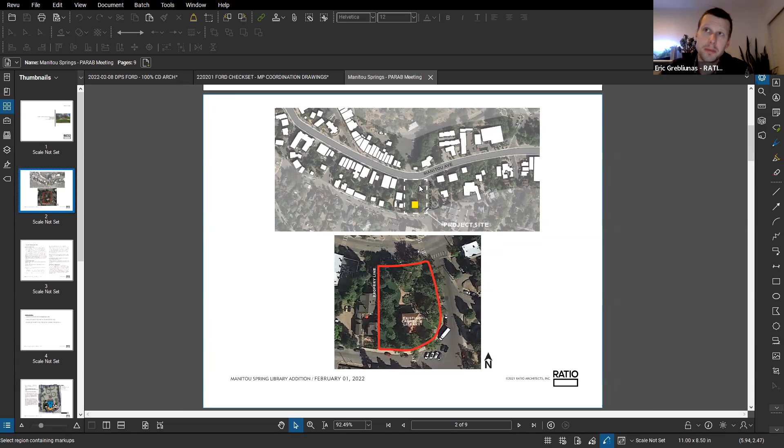All right, well, thanks everyone for having us. This is the Manitou Springs Carnegie Library Addition project. Just to refresh everyone's memory here, the Carnegie Library sits on the large park space on Manitou Avenue.

I'm on PARAB right now. Okay, I'll talk to you later. Bye.

A brief description of the project is that we are adding on to the existing Carnegie Library to bring it into the 21st century for libraries and provide a bunch of flexibility and accessibility to the library space.

I'm assuming I've talked with most of you in the past over our other meetings with Parab, and some really key items that came up is that we want to make sure you're minimizing the hardscapes and maximizing grass area. We want to minimize the impact the addition has on park space, and we wanted to explore the opportunities of the addition further to the south and some of the previous design options we've seen.

Sorry, give me just a moment. Could everybody make sure if you're not speaking, you're muted? We're getting some ambient noise. Someone is distracted. Thank you.

Thanks for bringing that up. The key elements for this addition and for this project to be successful are that we need to assure the Carnegie Library remains that celebrated moment and the prominent structure on this historic site, and that we're preserving as much park space as possible. I think the last time we got together there was general agreement on the direction we were heading, with some comments. The meeting ended with us still needing to go to city council, talk with the city engineers, and discuss site parking requirements. We wanted to circle back with Parab to make sure that if anything changed, we'd report back and show the ramifications of those changes.

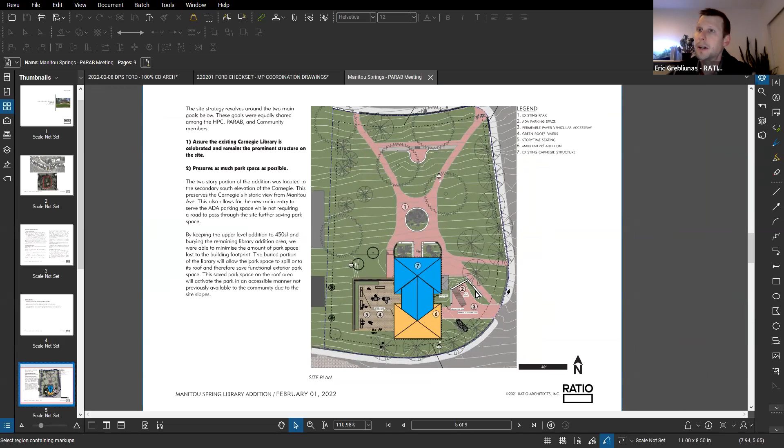I think that covers, in general, the minimal impact we've made to the site. Something else to point out, brought up by Parab, was the desire to have this walkway to the north be as small as possible. So we've reduced that down to a 6-foot pinch point from the existing landscape to the edge of the sidewalk, again trying to keep it as small as possible and giving back as much grass space to the park as possible.

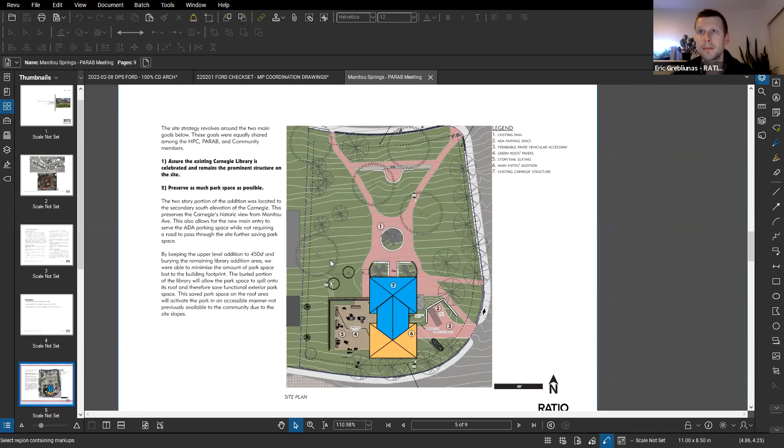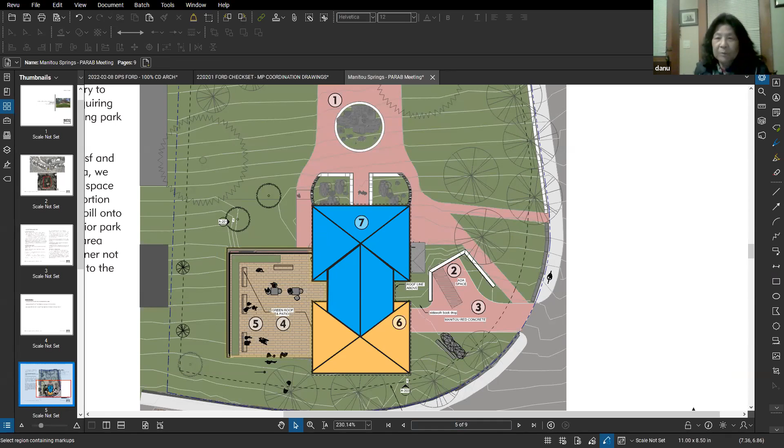I have just a quick question about the planters in front of the building—yes, the existing ones. When I look at the front of the building in your original first picture on the cover page, I feel like the library is really enhanced with the nice rounded windows and the low profile of the gardens there, where you can actually see more of the building. I was wondering, since we have all these nice rounded organic curves—the rounded grass area, the rounded curb area with the planter that's there now—is it possible to do that with your new planters, to make them rounder so they're not so 90-degree square coming out of that doorway, and soften that up, lowering the profile of those walls so they're more like curbs matching the height of the existing circle, to make it more rounded and organic and blend in with the natural contours that are there now?

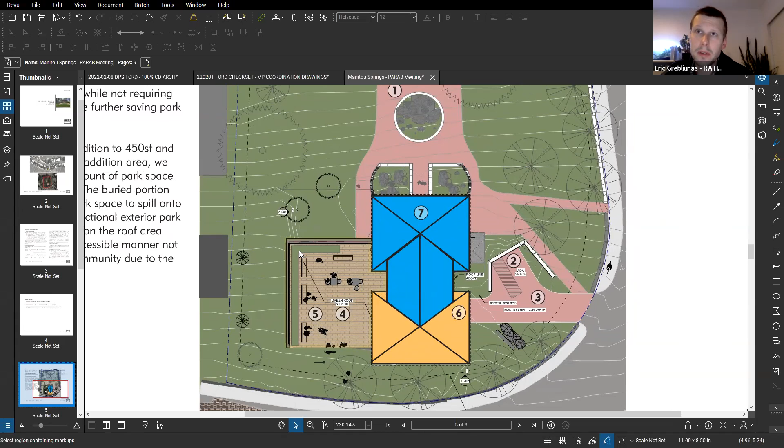Absolutely, we could definitely try to carry on more of the rounded aspects of the existing planters and hardscape work. Just to make sure we're on the same page, when you said the planters we have, were you referring to the green roof portion on the patio? No. It was the work just in front of the building—you actually have a better illustration of it further down in one of your pictures. So when we get there... well, maybe you don't.

So this is kind of the current. Yeah, do you have one? Yeah, right there, that guy.

Yeah, see how it's just so, to me, it looks so bulky and clumsy, and it doesn't have any flow or rhythm to it. And it really seems to me it takes away from the building. It'd be nice if the walls weren't built up so high, and maybe even if we had a little bit of space between the actual building and the planter itself.

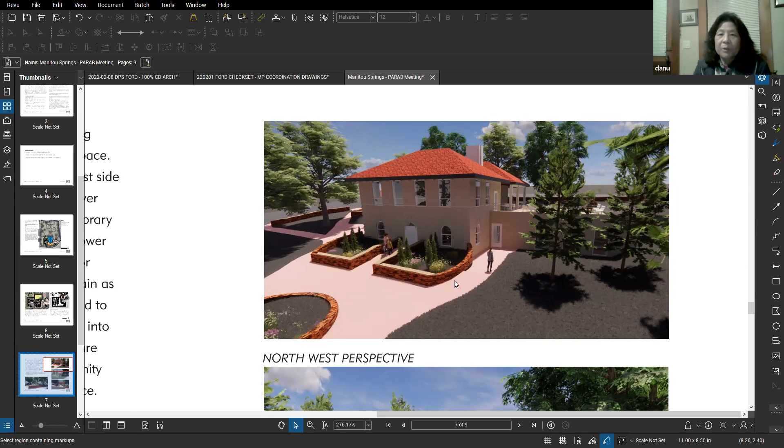Are we talking about these planters? Yes, correct. Understood. So maybe this will help clarify, but our intent is to leave the existing planters in place and not modify them.

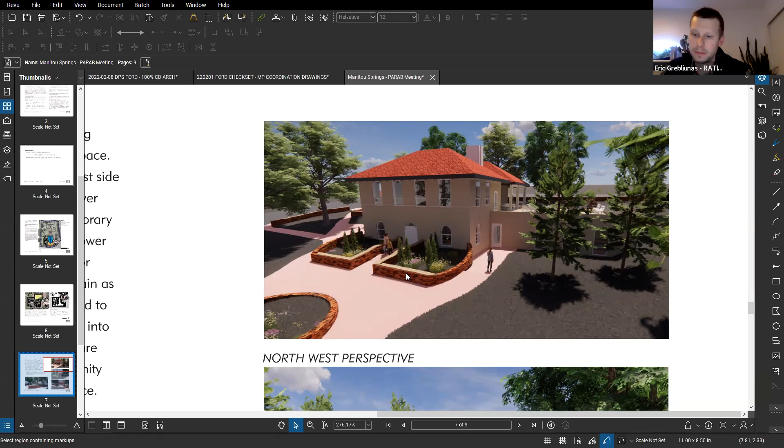Because they look pretty modified. Yeah, so I think what you're reacting to is just our rendering isn't exactly representative of what is there, but to clarify, the planters that are there right now would be the planters that will be there in the final design. We can make sure we clarify that in our plan moving forward.

Yeah, because it's very misleading the way you have it drawn. Yeah, I can appreciate that. The material isn't matched exactly, and the size. My apologies for that. But just to make sure we're all on the same page, the intent is that this is going to be the existing planter to remain, and we'll make sure to note that again.

I suppose we could do a little bit of a pink curb just to define it better, just to keep things contained, but nothing like the walls, because they definitely look like actual sitting walls that people could sit on. If you look on the corner of the building, they rise up pretty high there, going up against the building.

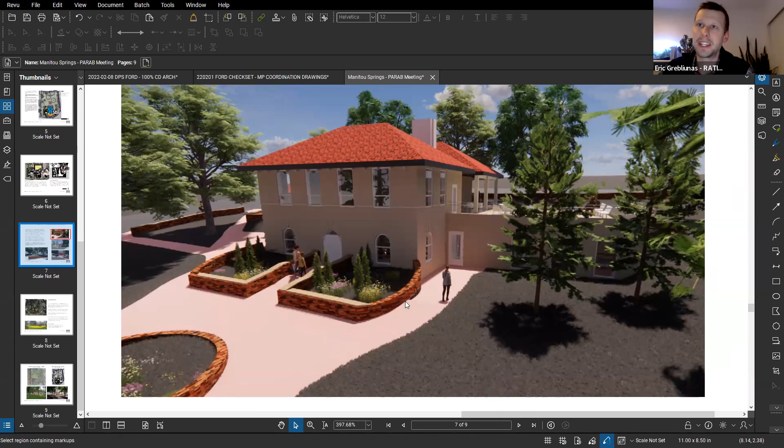Yeah, understood, that is just a graphical error on our part, I would say. Otherwise, I appreciate how much you've minimized the hardscape. I don't know, that's just me. I don't know if anybody else has any other different thoughts or feelings about that particular area.

I think it looks great. I think it's going to be a great addition, and about time. I'm glad we're jumping in. Well, I missed what Jan said. Jan, what did you say? I think it's a great addition and it's about time, and I'm glad we're jumping in. Okay.

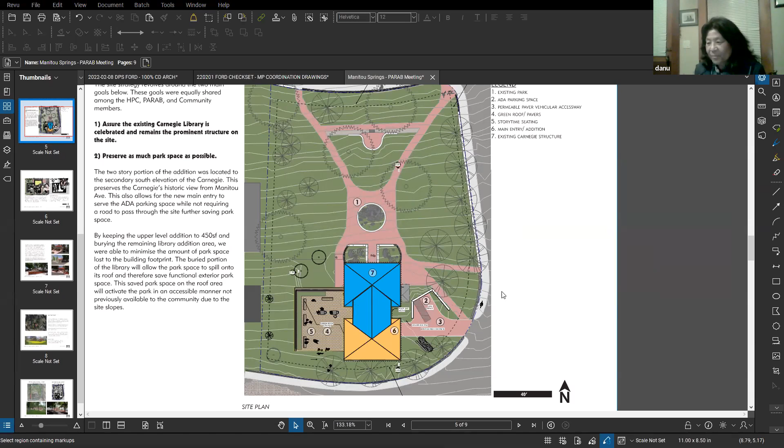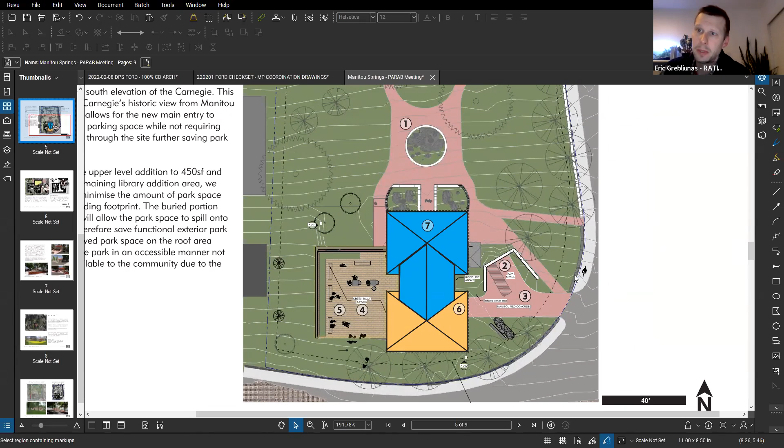And so I guess the other site element I want to point out is there will be a new retaining wall around this existing parking spot. The intent is for it to either match the existing planter or try to work with the existing site wall, depending on material availability we can find. But other than those areas, the remainder of the site is remaining as unchanged as possible.

I won't necessarily go through the floor plans in detail, but just to touch on them a bit: from the main entry and the ADA parking spot, you'd enter the building. There's a stair that would take you down to the lower level, or an elevator. Then we're repurposing the existing Carnegie on the upper floor for that community room, and looking at opportunities of reusing the existing casework there for some additional functionality. Then you have that outdoor patio space with the roof to spill out onto it.

And then on the lower level, again trying to give the user, once they get down there, views open to that north elevation looking out to the park. We're making sure we're providing a flexible space for the library to grow and adapt with whatever the future brings. The lower level children's library will remain for the children's area, and it's going to get an interior renovation as well.

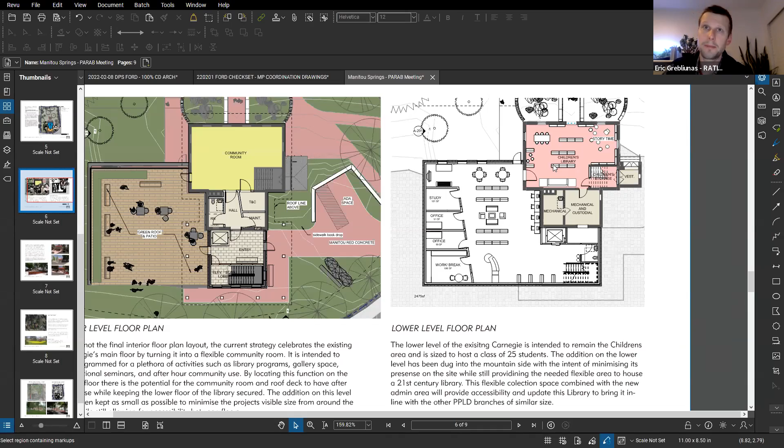And here's just some images. Again, just going to touch on how the addition is really tucked away, set back, and low profile to make sure the existing Carnegie has the priority and prominence on the site.

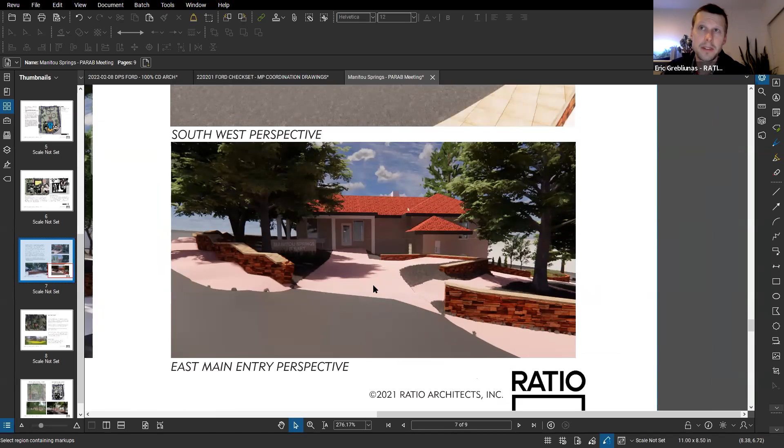Here's a visualization of what that main entry drive aisle and walkway would look like with the angled parking off to the side. And then an idea of how that rooftop area would allow park spaces to spill out onto it, whether benches or planting areas, as well as how that roof overhang can create some covered outdoor space for park visitors to use.

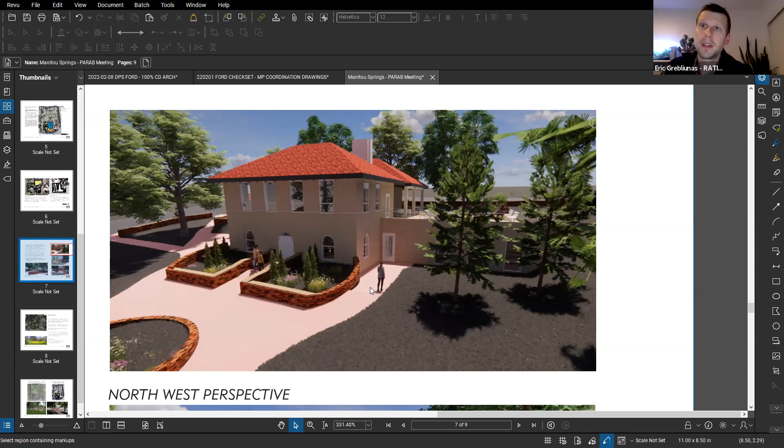And for the south area, showing that we really tried to reduce the amount of hardscape going to the new main entry, we are going to leave these existing planters alone and try to maximize the amount of green grass space that's available.

An arborist came to the site, and the EcoTree report reviewed the health of the trees on the site. Through this addition project, two mature trees are being removed because of the addition footprint and also the over-excavation from the foundation installation, which would kill trees not directly in the building's footprint. The arborist noted those two trees are end of life and recommended we replant trees in their place, which is what we intend to do.

We're also looking at ways to repurpose those trees, whether for site furnishing or the ability to honor them in the addition.

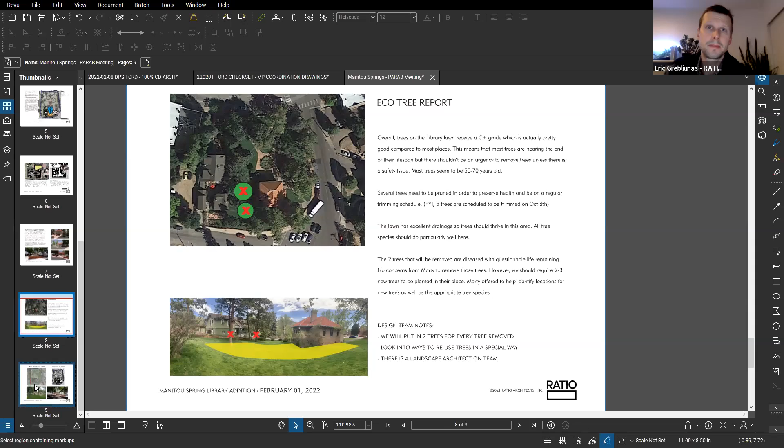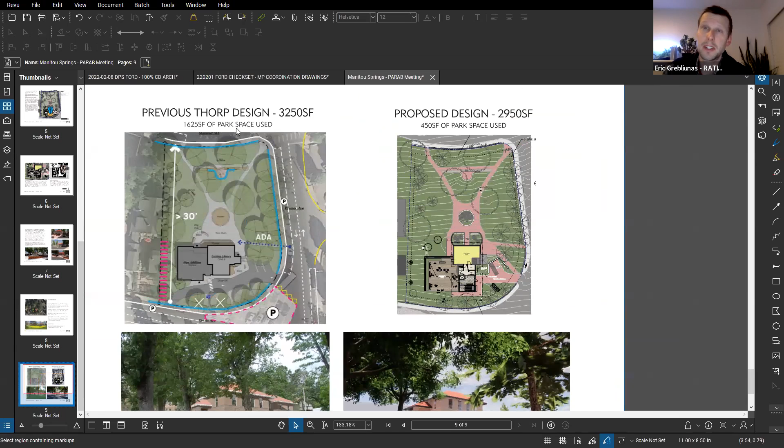Lastly, to reiterate, the addition being proposed now is smaller than the previous design. What's very important, and what we've heard from PARAB and the community, is the desire to save as much park space as we can. As a result, we're only looking at about 450 square feet of park space that will remain enclosed, which was previously exterior. All other portions where the addition is going are being given back to the park, not taking away from it as much as possible, compared to the 1,600 square feet of park space that was being removed by the two-story addition in the past.

That is the update from our city council, our city engineer, and our parking discussions. Again, not much has changed, which I think is a good thing, and it shows how the meeting with PARAB and the community in the past has really helped this project find its way forward.

So I guess with that, I'd open up to any questions or comments, or if there's anything anyone would like me to discuss in more detail, we can try to get into it.

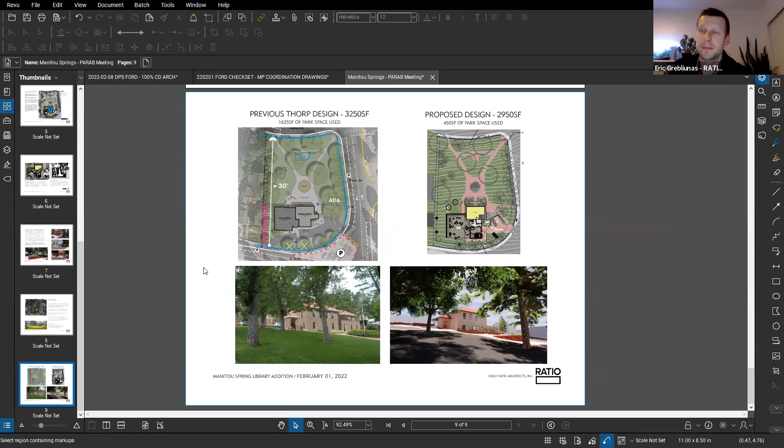I like it. Excellent.

Jan said: I was just going to say, I like how you minimized the footprint of it a lot, and that you shifted a lot more of it to the south of the building, so that you can still get the full feeling of the original library structure. I think you guys did a great job.

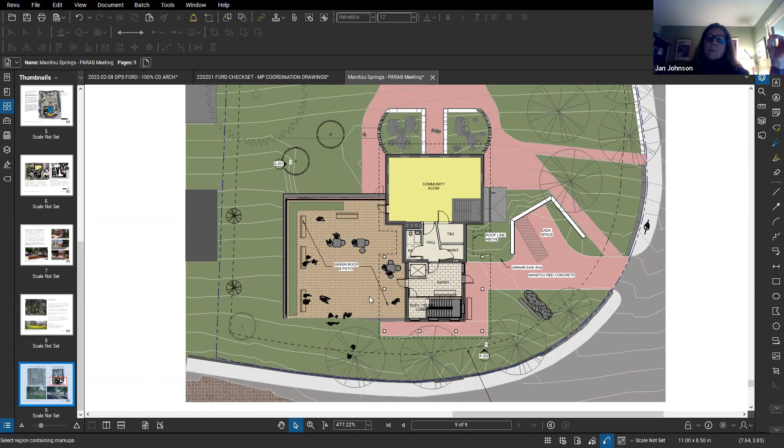Thank you. I think you were very responsive and I appreciate that. Let's get going on build. Excellent. Thanks, Jan.

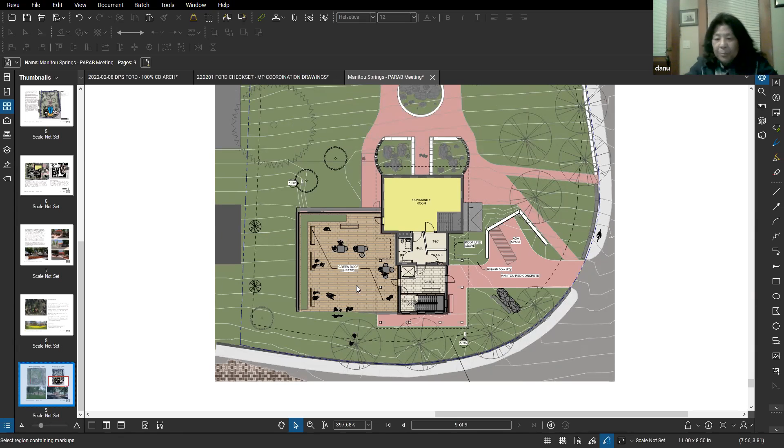Okay, any other questions for Eric? I did notice that we have quite a few folks from the library group. Would anybody like to jump on and add a few more comments or anything?

I'm Michael Doherty, director of the West Region for Pikes Peak Library District. I really appreciate working with Manitou Springs and Eric on this project. This is something I'm getting more and more excited about as every day passes. Really looking forward to seeing this come to fruition and excited about what we can bring to the community.

I know Taryn, the new manager, is here. Taryn, do you have any words? I would just second exactly what you said. I've been in Manitou since October, so it's been a really exciting journey, and I've really enjoyed all the steps of it. Thank you so much to everyone, and we're really excited to get going.

Taryn, are you our new librarian? Yeah, I'm the new manager of the branch. Oh, okay, yeah, okay. Danu, I can't see you, so I won't be able to recognize you. Danu, if I can just- hi. Oh, Rob, this- yeah. Hi, Rob.

Hi, how are you? I just want to reinforce what others have said tonight. We're quite excited being part of a task force to help move this project along, not only how responsive Eric and Ratio have been, but how responsive the community has been in general to get us to this point. It's been a truly community-based collaborative effort, and we will continue that as we go into this next phase, particularly with getting the final approval, but also with the fundraising. So, like Jan said, we're quite excited to move forward now and finally get this thing done.

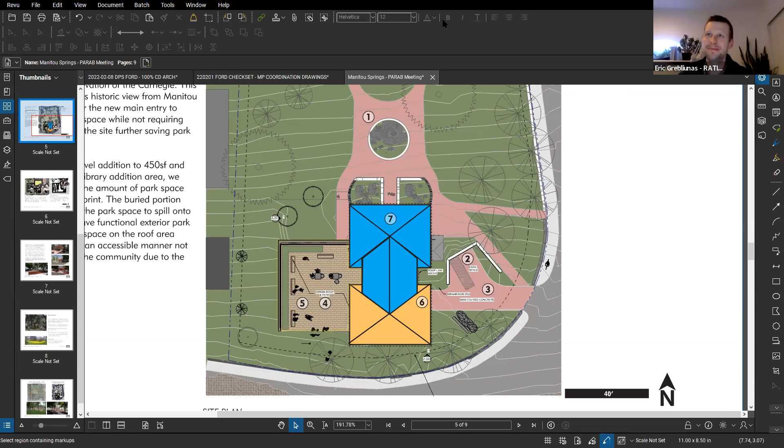Okay, we're on item number 6 for reports.

Parab, we were contacted by Steve Wood of Concrete Couch. His group are the ones who made the enclosure around the Bud Ford Pavilion in Soda Springs Park, and in that enclosure they included these glass roundels. There are 3 of them that are broken now, and he wanted approval to replace the 3 broken ones at a cost of around $350. I think that would be really important to do.

I didn't know if Skylar wanted to cover that as part of parks, or if you wanted us, Parab, to cover that. Yeah, I can cover it, no problem. Alrighty. The other thing I mentioned to him was that parks staff were fixing all the little free libraries, but they were needing maybe a new paint job, and maybe if some panels need to be replaced, if Concrete Couch would be willing to do that as well. So I just put that out there for them. Other than that, that's all I have to report.

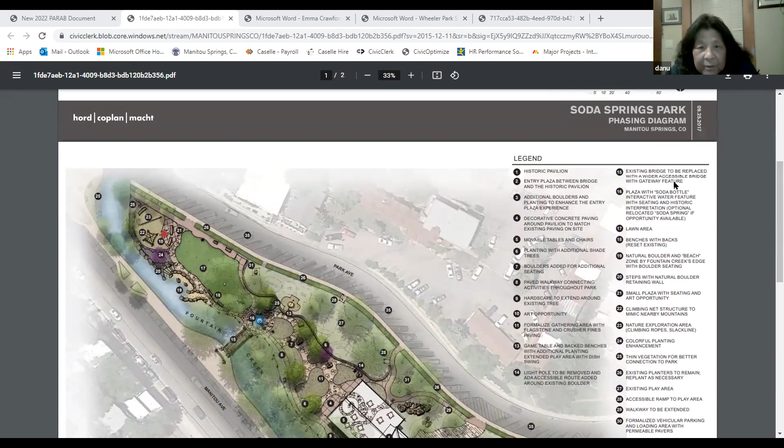Can you go to the other map that shows phase 2, what area that is? Right there. As everyone can see, phase 2 deals mostly with the area in front and in back of the pavilion. At our strategic planning workshop, the things we identified were the water feature. In this phase 2, there's a little concrete apron at the front of the pavilion, looks like a checkerboard. We can talk about whether we want that to be an extension of the pad, an apron of concrete, which would help minimize drainage there, because it always tends to get muddy and messy.

The only drawback is they ran a gas line right in front of the pavilion, so if they ever had to access it, they'd have to jackhammer that concrete apron out to get to the gas line. That would be the only disadvantage to doing concrete there. It's possible we could do crusher fines instead, though I don't know how that would incorporate into the overall look of the park.

Another thing phase 2 called for was, inside the pavilion on the slab, there were cracks. What Hord Coplan Macht, our architectural designers, proposed was to go in and fix the cracks and then replace it. At that time, we were going to use flagstone instead of crusher fines, and do a little flagstone design to try to fix the cracks in the pavilion slab.

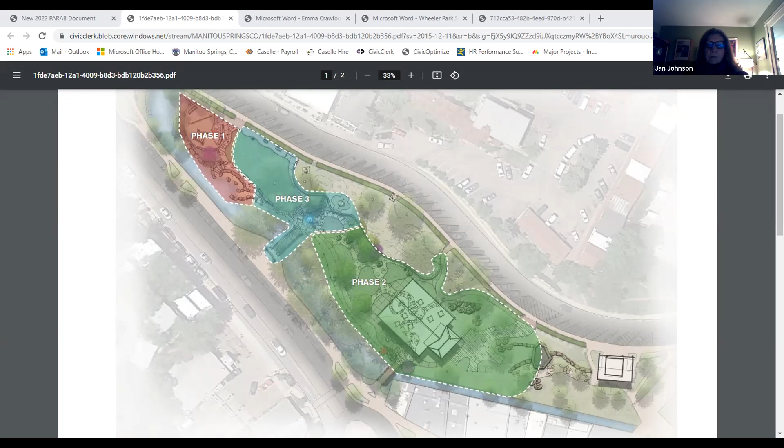So are you just saying we should try to complete our paths, Tim? Yeah, Soda Springs is full of it, there are at least 2, maybe 3 paths to nowhere there.

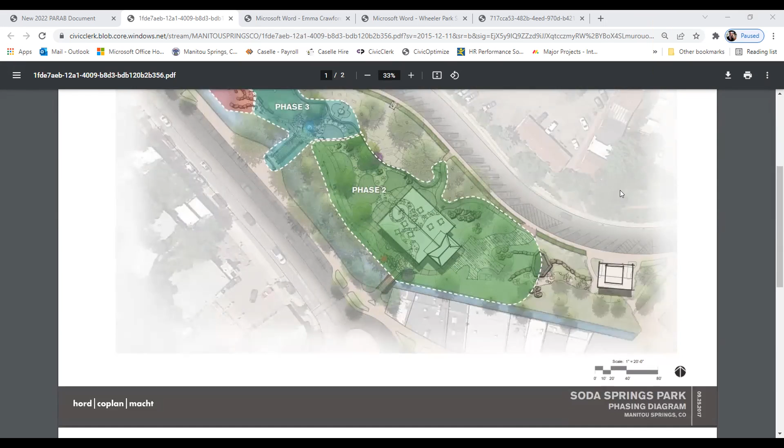Well, I don't think we've addressed the tiny path on the side of the pavilion towards Manitou Avenue, where the rain garden is, and what that little area would turn into. Concrete Couch had done a little path there a few years back, and some of those stones or concrete blocks are still in place. So maybe there's another opportunity for a local art project to kind of revamp that area.

I don't know that we've talked about that — another path to nowhere. Well, that was supposed to be an ADA path. That path you're talking about, Jenna.

And running downhill from there was supposed to be an ADA path, which is a little hard to discern. So that probably would be an area to look at too, trying to figure out something to do with it.

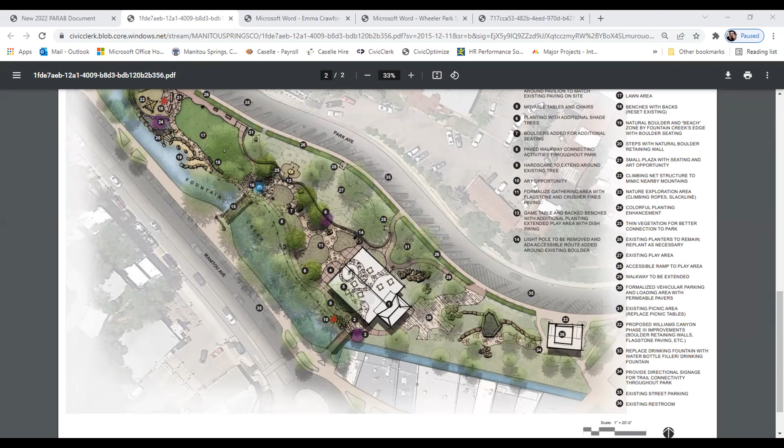These are the restrooms that most visitors who come to Manitou use, so maybe we could make that impression a little nicer, aesthetically pleasing. Also, they're not ADA accessible, those restrooms. Right, that's what I'm saying. This might be an opportunity to make them ADA and renovate a little bit.

Well, I think - sorry, go ahead. Skylar, do you know about the old Colorado City Bancroft Park bathrooms? No, I don't think so. It's in old Colorado City, between I think 26th and Coburn or something, there's a park called Bancroft Park. They have this bathroom, and I don't know, it's got to be dang expensive, but maybe we could get a grant for it.

After, what is it, 4 or 6 visits, the entire bathroom shuts down and washes itself on the inside. It's got all kinds of fun decals and logos, almost its own graffiti on the outside. It's really pretty cool, like a bathroom bidet. Go have a visit to the bathroom in Old Colorado City and see what you think, and if it's worth going big or be partially working on redoing it every 2 years.

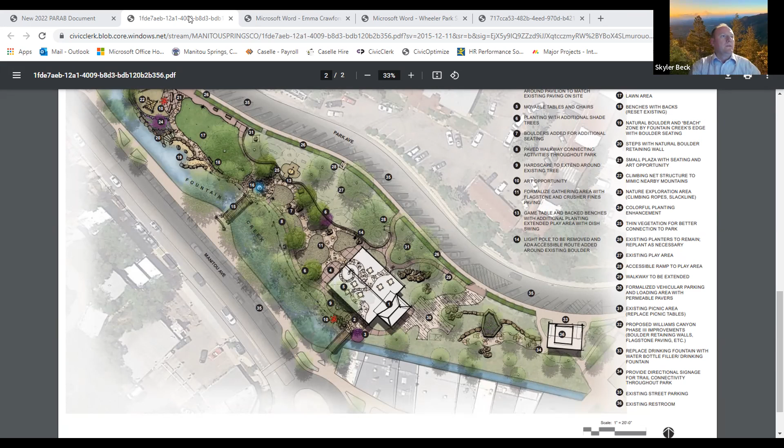We talked about setting up a time to go up to Higginbotham Flats for a little field trip. I think everybody's been up there, either within our own little group or with Skylar.

So I'm kind of thinking to maybe send out the last minutes that we had with the joint meeting between Save the Flats and PARAB, just so you guys can have an idea of what we talked about at the joint meeting. Chris, you got your hand up, Chris?

And then I think somewhere I might have some notes of what PARAB kind of talked about as well. But I know the more recent things that Chris, Rebecca, and I talked about was trying to have some sort of a Native American theme to that park up there, to honor the indigenous people, the Ute Indians who first came to this area. And I really like that idea of having either some kind of a gateway sculpture piece or something that would do honor to the Ute Indians.